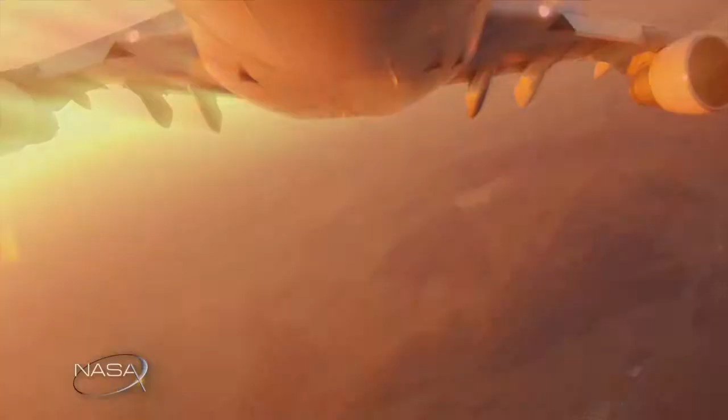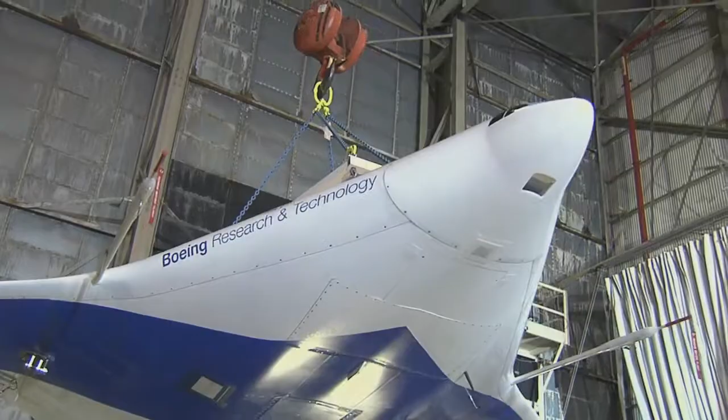But how will they reach these goals, and who is performing the important work to change the way we all fly? The common misconception is that most advances come strictly from major aircraft manufacturers. But the true story is much more complex. Unknown to most of the public is that one of the unsung leaders in aviation is NASA.

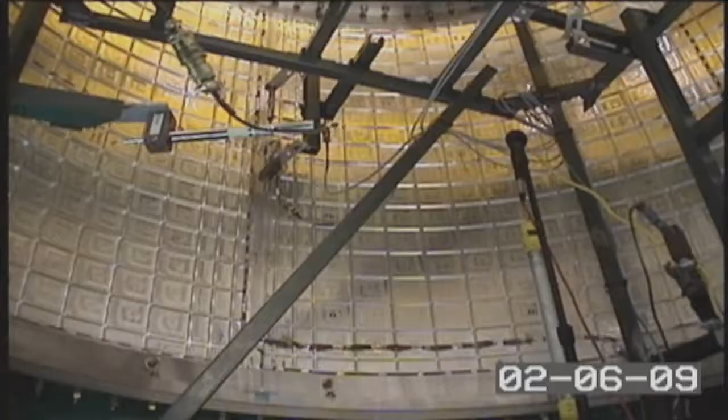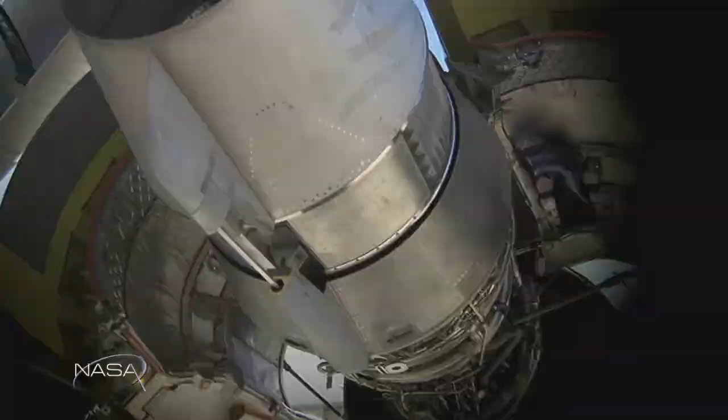NASA engineers work hand in hand with industry planners, developing and testing new designs to make aircraft safer, greener, and much more efficient. On this episode of NASA X, we will look at how this collaboration works, and we'll see how NASA and industry are paving the way for greener, safer aircraft for today and for aircraft of the future as well.

This is a familiar sight for modern travellers. Large metal jets roaring down the runway and lifting into the air. In fact, this sight really hasn't changed that much in the last 50 years or so. Other than the way most people dressed for flights back then, the basic concept of air travel is pretty much the same.

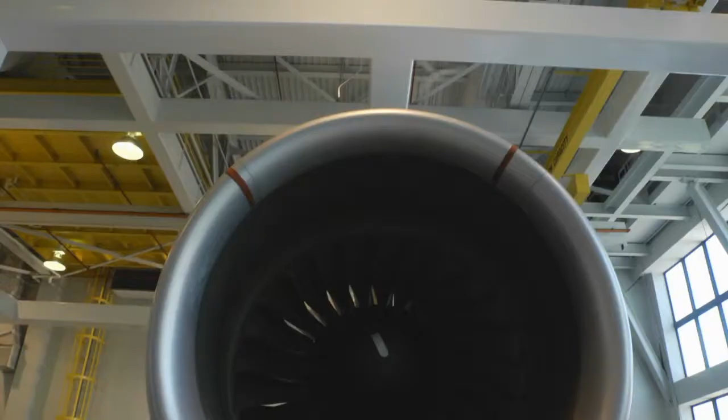There have, of course, been measurable differences in fuel economy, with new developments in engine design and noise reduction techniques. But the basic tube and wing shape and the material used to build these aircraft has remained pretty much the same for years. But that isn't the case anymore.

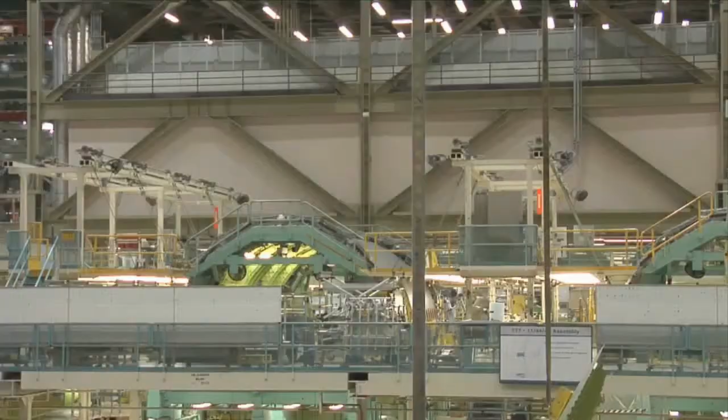Like so many products that have evolved dramatically in the last few decades, like phones for example, the same is true for aircraft design. Today more than ever, researchers are pushing the boundaries of the science of flight in their effort to make aircraft of the future more efficient, quieter, and greener. So who's taking the lead and why?

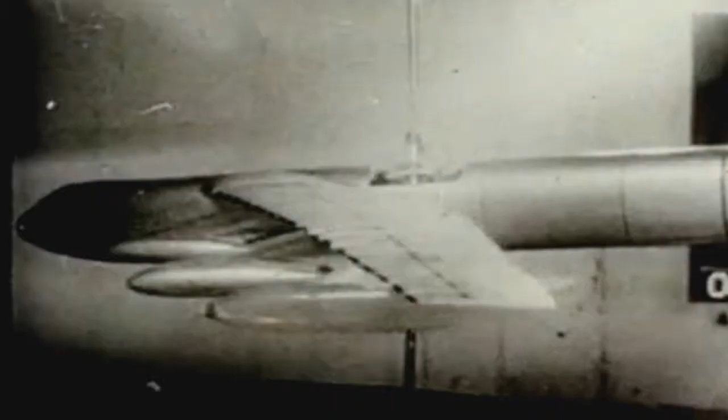Obviously industry is taking the lead in some areas because cleaner operations and more efficiency mean higher profits. But they're just not the only players. One of the leading innovators in aeronautics over the history of flight has been and continues to be NASA.

The push to modernise and change aircraft of the future is being led by NASA's Environmentally Responsible Aviation Project, or ERA. The ERA project is putting its money where its mouth is with tough but reachable goals to make big changes in how we fly by the year 2025.

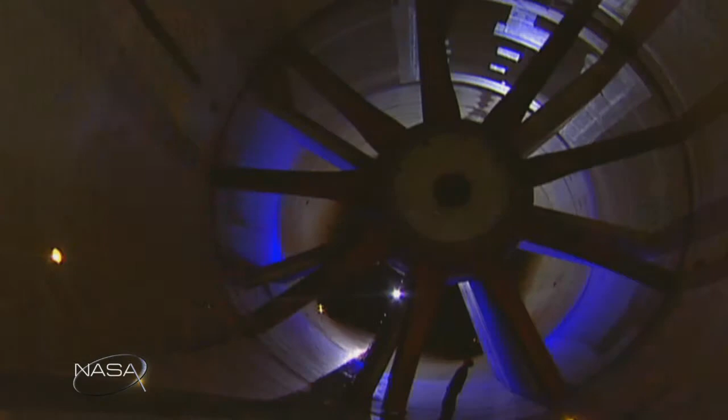So the Environmentally Responsible Aviation Project is a 5-year, 6-year project, and it's focused on advanced aircraft design and the technologies that are needed to enable them. The main goal of the project is to reduce noise, to reduce mission fuel burn, and to reduce LTO NOx emissions. And LTO stands for landing takeoff, oxides of nitrogen emissions.

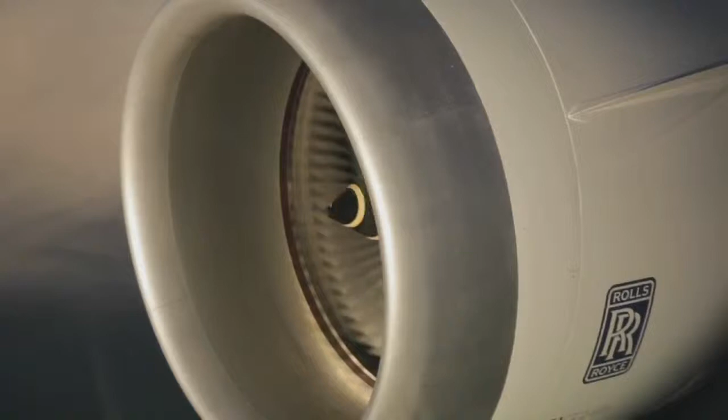And we want to do that simultaneously, and that's never been done before, where we looked at some very difficult metrics and tried to push all of those metrics down simultaneously. And so over this 5 or 6 years, we'll be looking at technologies, we'll be looking at aircraft designs and the combination of those to end up with a configuration that could simultaneously attack these goals.

So how do you make these goals a reality? The 4 basic principles of flight are lift, drag, weight, and thrust. Finding efficiency in each of these basic principles will help reach NASA's stated goals. Let's look at weight first. Obviously, if you can reduce the weight of an aircraft, then you will burn less fuel and therefore become more efficient. Airlines are always looking for ways to carry less weight.

You can see that in extra baggage fees, reduction of heavy items such as ovens and heavy carts on some planes. And in one of the most drastic measures taken in recent years, some airlines have begun asking passengers to use the bathroom in the terminal before getting on the plane, making the passengers a little lighter.

In a 1-month experiment, an airline found that they reduced greenhouse gas by 5 tons simply by asking passengers to use the loo ahead of time. This proves that even small changes in the weight of an aircraft can add up to big long-term benefits. The holy grail, of course, is to make the entire aircraft structure lighter.

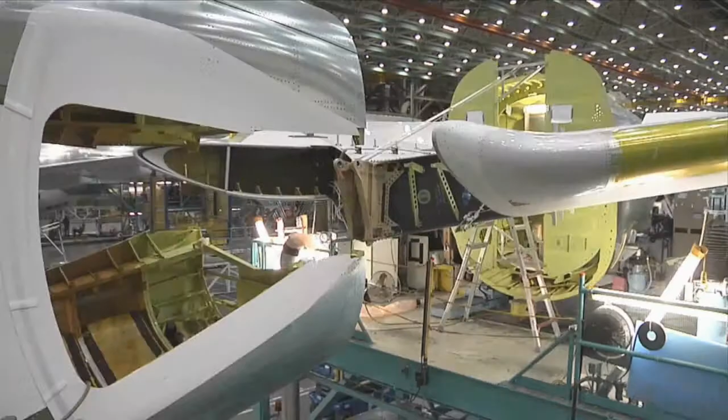So how can this be done? Today's aircraft are made out of metals that are safe, but that are also very heavy. So is there an alternative? In recent decades, NASA and its industry partners have been working hard developing new materials that could bring aircraft out of the 20th century and into the future.

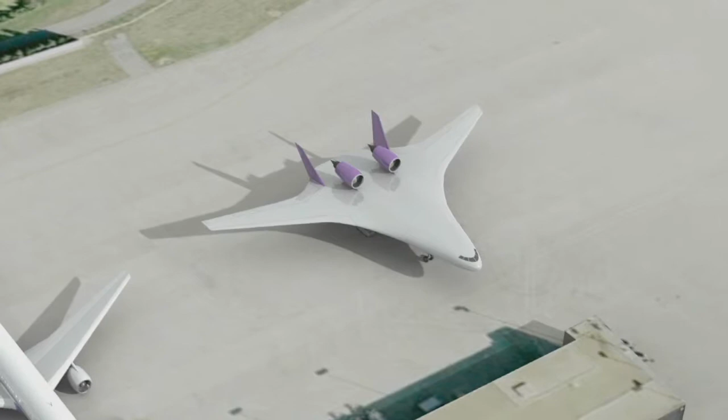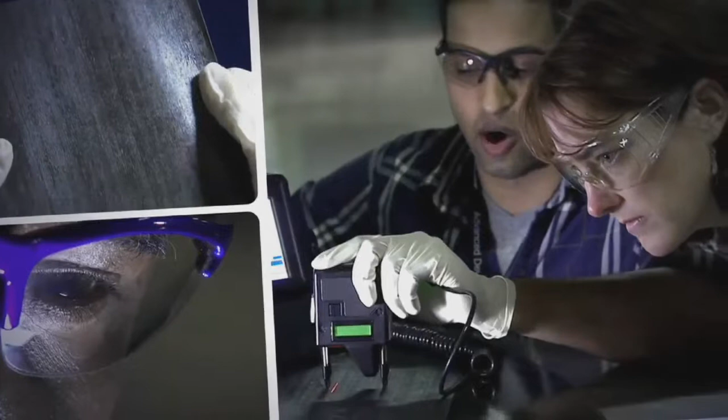New composite materials are leading the charge to replace conventional metals. Aircraft designers are taking advantage of composite materials' lightweight, strength, and flexibility. Aircraft designers have long known about these qualities and have been using something called carbon epoxy composite materials in small quantities for decades.

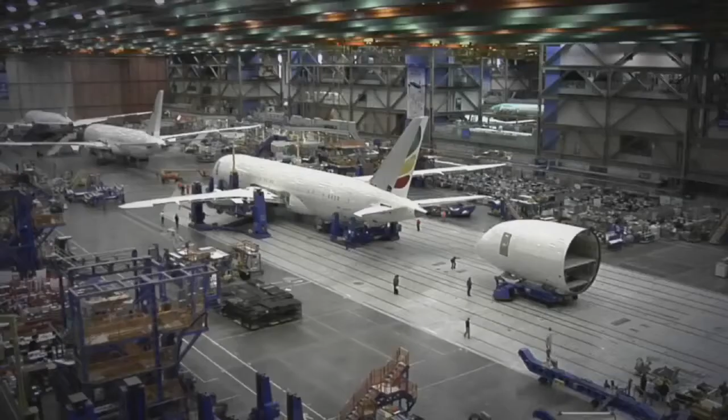After years of research and validation of composites for flight, the Boeing company was the first to step up and build an aircraft almost completely out of composite materials. Called the 787, this next-generation aircraft first came into service in October of 2011. As the first official commercial flight of the 787 took off from Tokyo that year, it was clear that this concept of an all-composite aircraft was here to stay.

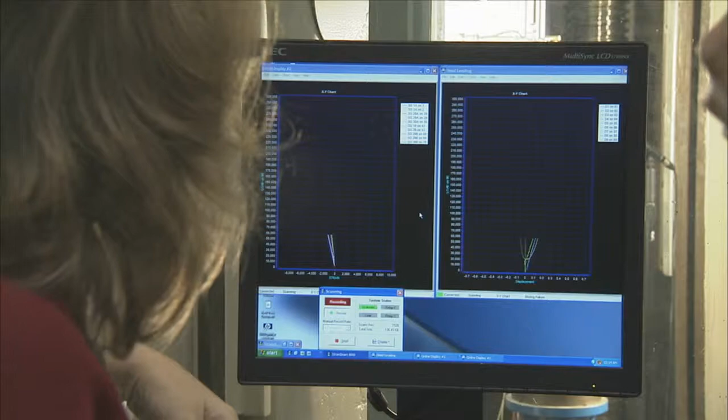NASA is not in the business of building aircraft, but they are in the business of helping lead development programs to move the science of flight along. Once validation and testing in the development process is complete, NASA shares its findings with industry in an attempt to help further research and development.

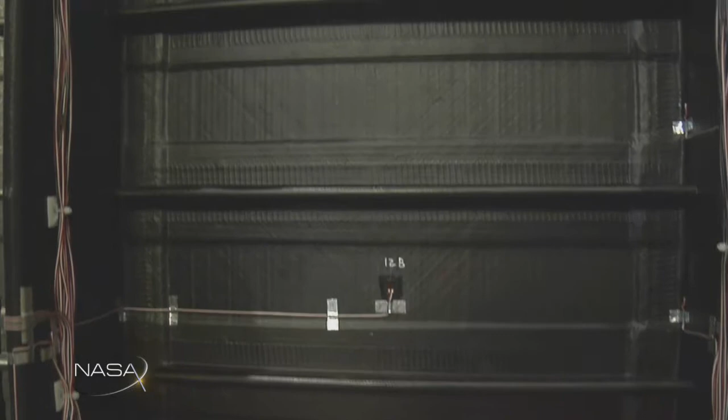One of the programs in which NASA is working with industry is in the development of new composite materials for aircraft. Here, in the Structures and Materials Lab in Building 1148 at NASA Langley Research Center, much of the development of next-generation composites for use in aircraft is taking shape. Called PRSEUS, this new idea has the potential to completely rewrite how composites for use in aircraft are made.

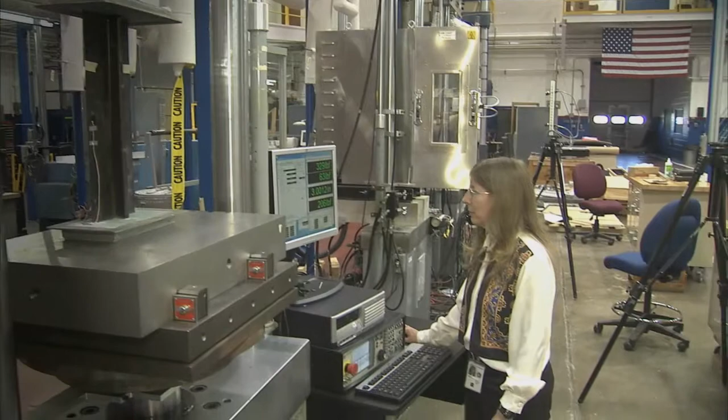Leading much of the research for NASA's environmentally responsible aviation program in the composite field is NASA Langley's Dawn Jegley. This MIT grad has been working with these materials for decades and has a keen understanding of what needs to be done to make these composites of the future fly.

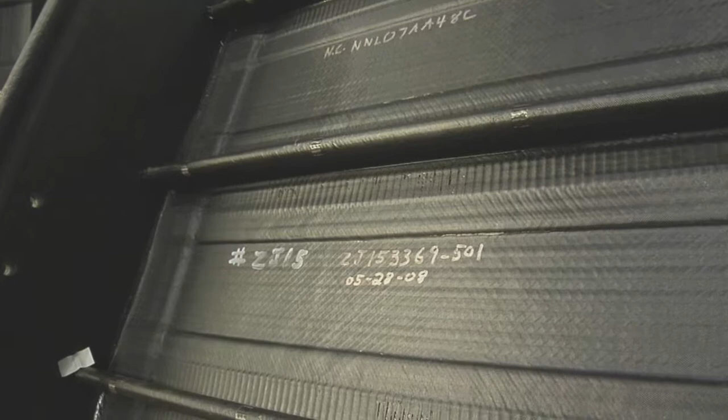PRSEUS stands for Pultruded Rod Stitched Efficient Unitized Structure. And what that means is that we have a graphite epoxy or a carbon epoxy structure, and what we have is pultruded rods inside carbon layers. We have a carbon skin, and we have stitches that run through the thickness that holds the whole thing together.

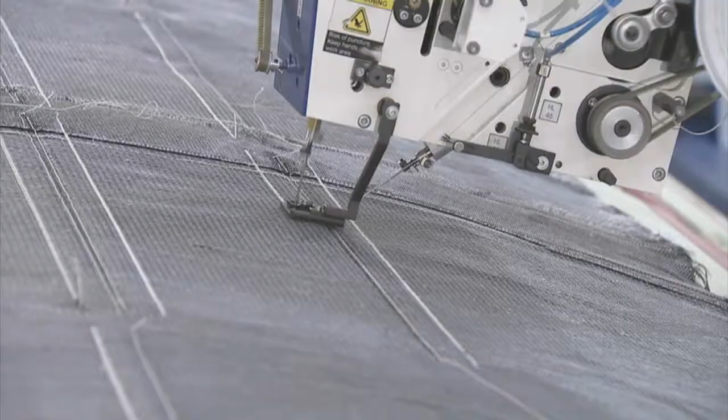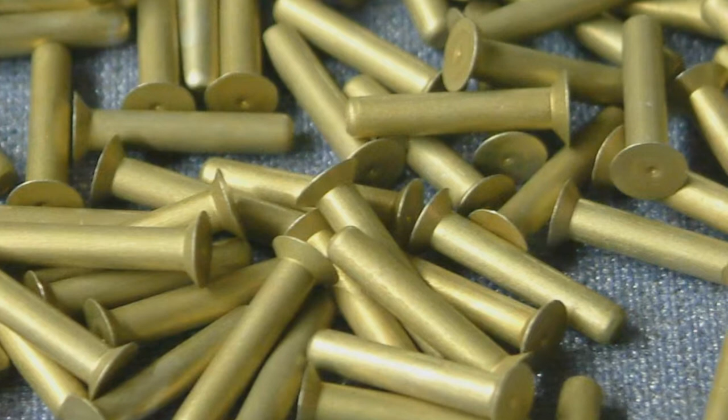One of the huge benefits associated with PRSEUS is its revolutionary stitching technique. On current metal and composite aircraft, one of the key components used to hold the vehicle together are the fasteners, like rivets or bolts. Although these are effective, one major drawback is that quite a few holes have to be drilled into each piece where the fasteners will be added. Not only is that labour intensive, but each hole represents a place where damage or a crack could start.

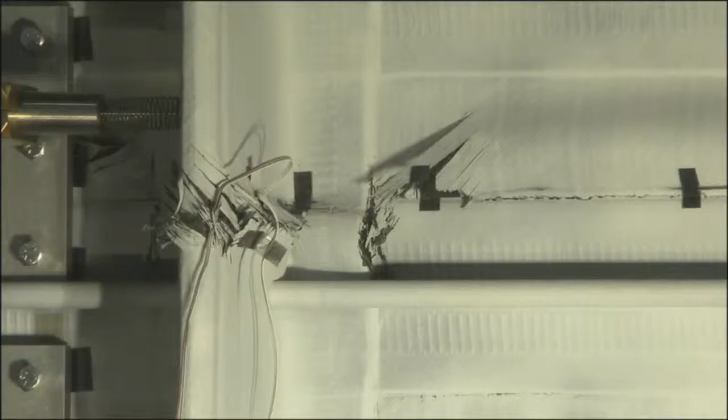But the stitching prevents that from happening. We found that if you have a crack and it grows to a certain point and it gets to some place that it's stitched, that crack will turn. So instead of going through the stitching, it will turn, and that's a good thing because in flight you would rather not have a crack grow all the way around a wing.

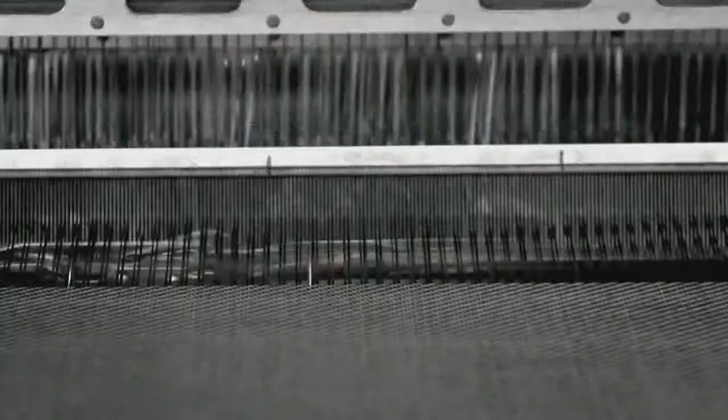When you look at a piece of carbon epoxy composite material, it honestly doesn't look very strong in its raw form. But once it is in its final state, it can be much stronger than metals. We start out with a fabric. It looks kind of like carpeting. And you roll that out into the shape that you're looking for, and you position all the different parts of your structure where you want them, and then you come through with a stitching machine.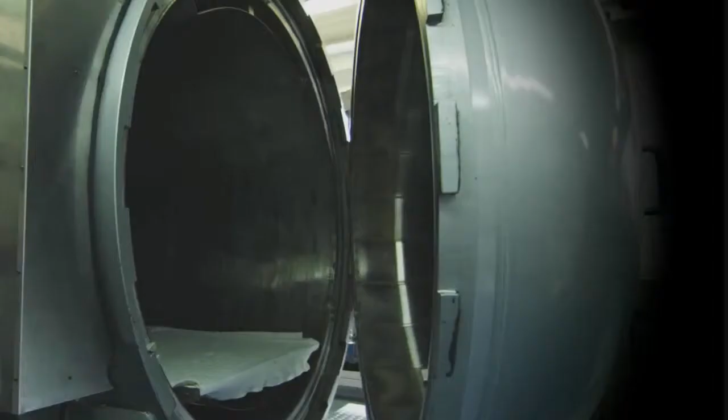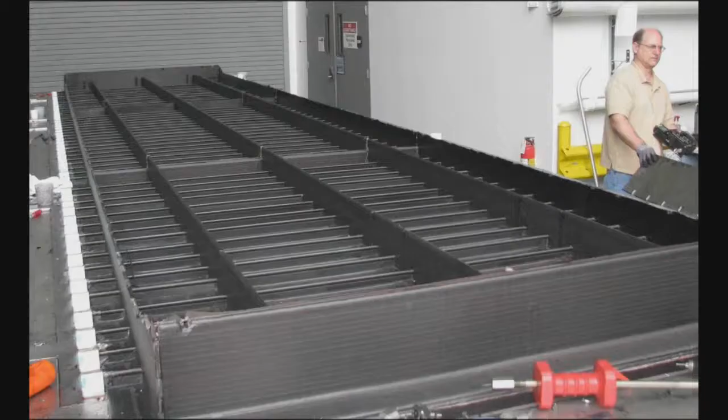After you've stitched the whole thing together, the panel goes into an oven. It's infused with epoxy. We heat it up, and then we get everything just the way we want it, and then we cool the structure. So what happens is you end up with a piece of material, could be a very large piece of material, which is now stiff and strong and just in the right shape that you want it.

Another key component to carbon epoxy composite materials is that they can be tailored to be much stronger than metal. At the molecular level, the properties of metal are isotropic, which means that the properties are the same in all directions. Because of this feature, aircraft designs are very bulky in some areas to provide stiffness, making a craft much heavier. But with composites, you are starting with fibres which are very strong, tough threads, and you can position those threads in any direction you want.

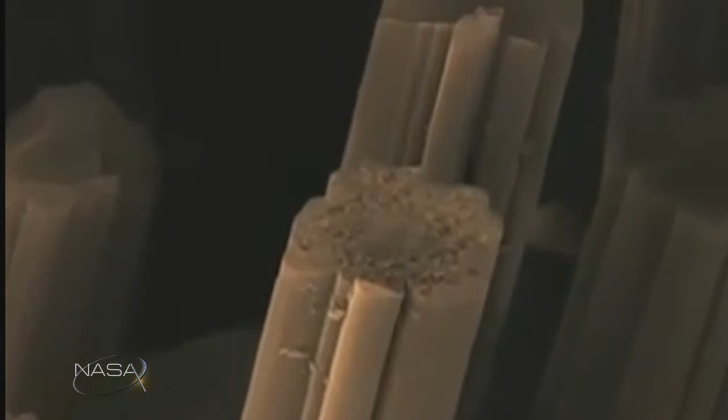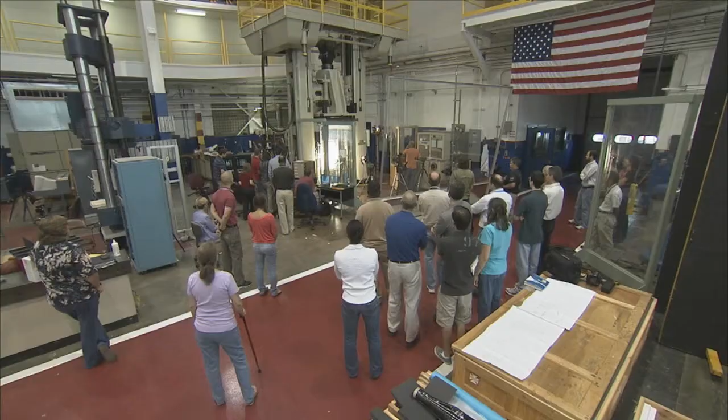For example, if there is an area on the aircraft that takes a lot of load, the designers can place the fibres in that direction, providing enormous strength, but while also using much less material and weight than metal aircraft. Of course, validating that the pieces will work is a major component of the development stage. So I know that NASA really does some great testing of its materials before they go onto any aircraft.

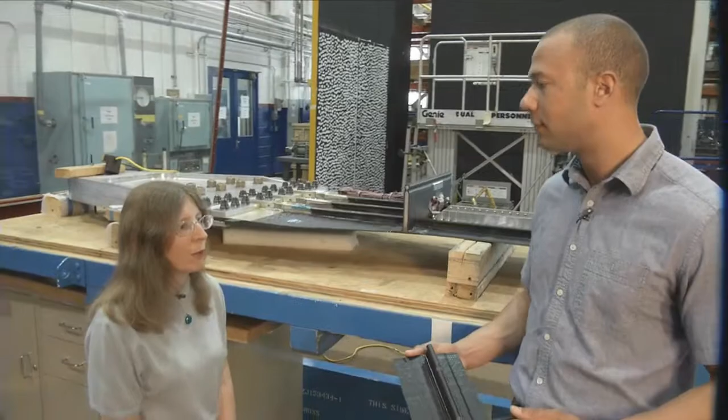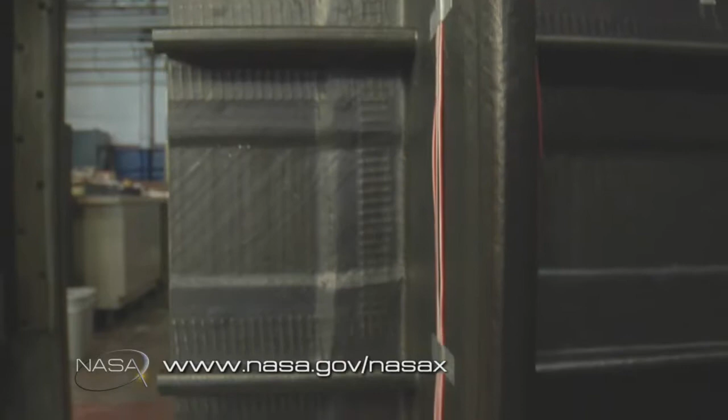How are you testing PRSEUS at the moment? One of NASA's goals is to develop technology for future aircraft. When we're developing a new structure, one of the things we need to do is fully understand how it's going to behave. And to do that, we start by looking at very small pieces, and then we move up slowly to very large pieces until we get to a full-scale part of an aircraft.

And then when we understand that, we go to the next stage, which might be something more like this, where we have what we call a built-up structure. So we have a skin, and then we have a stiffener on it. And then we can apply a load. We might push on it, we might pull on it, we might bend it, to look at how that behaves.

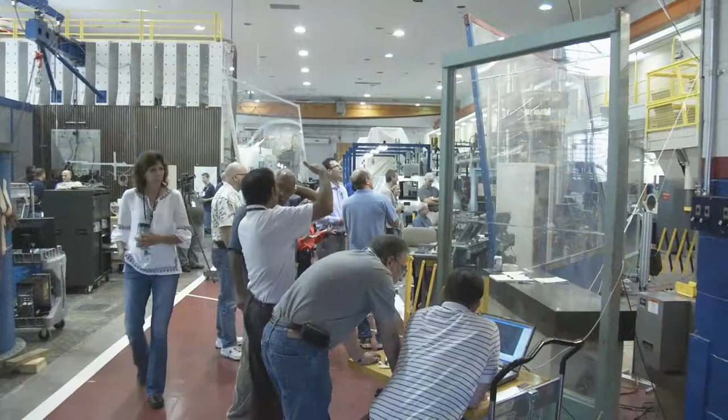And all the while we're doing this, we're doing analytical studies to make sure we understand and can predict how it's going to behave. Because if we don't predict it properly, then we feel we don't really understand it well enough, and we have to take a step back and figure out what it is we're missing. We have many facilities around the center here that we use for doing those kind of tests.

Well, Dawn, thanks so much for talking to us today about PRSEUS. This looks like an amazing technology, and you're doing a fantastic job. Thank you so much. Thank you.

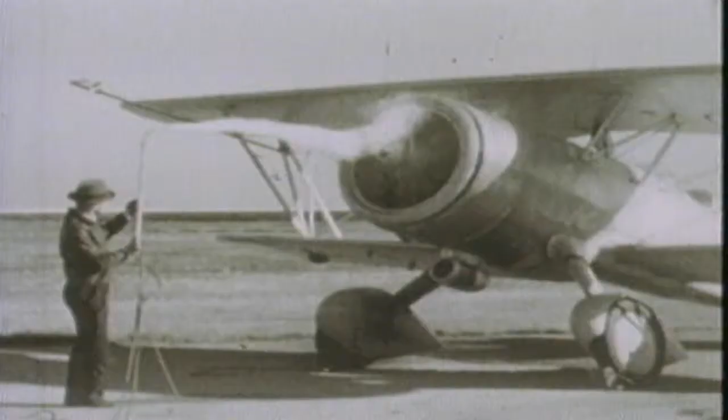Up next, let's look at another of the basic principles of flight: thrust. Since the earliest days of flight, engineers have looked for ways to make the engines we use on aircraft more powerful and efficient. One of the most important early engines was the 1903 Wright brothers design that was used for their very first flight at Kitty Hawk. It only produced about 12 horsepower, but it opened the door for all aircraft engines to come.

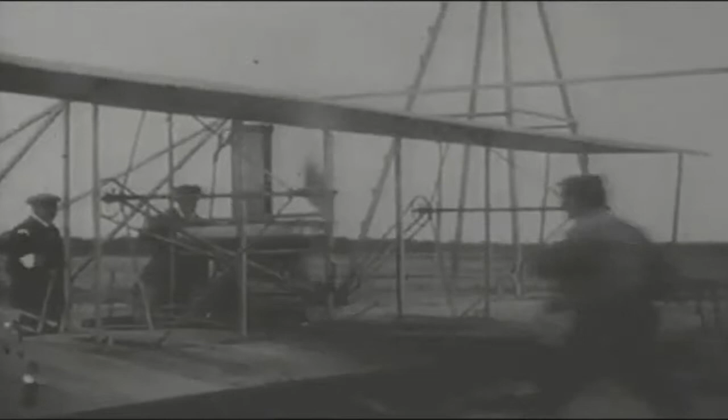Since that time, there has been a steady progression in the development of engine technology, from the relatively simple propellers of the past to the incredibly advanced jet propulsors of today. Engines have never been better, but although current engines are already very efficient, quiet, and relatively green, they pale in comparison to what the next generation of engine technology will be.

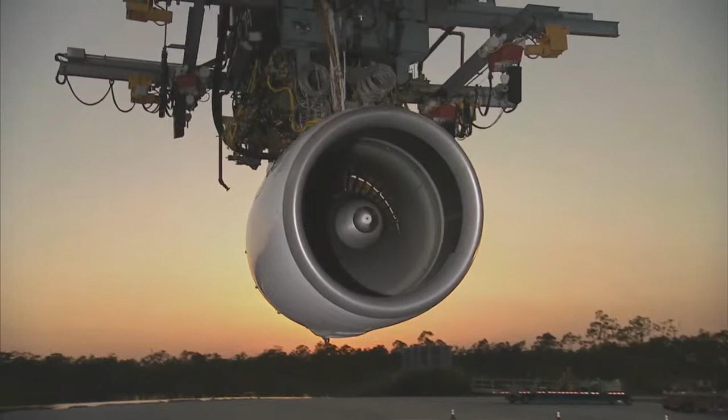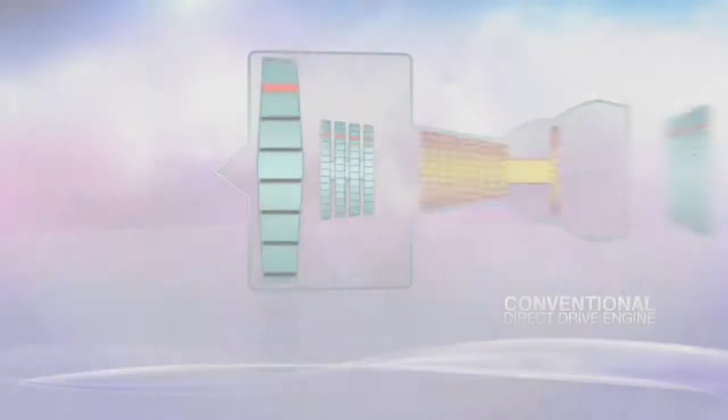To help understand how engine technology is improving, let's first take a look at how a basic turbofan engine works. Incoming air is captured in the engine inlet. Some of the air passes through the fan and into the compressor and burner, where it is mixed with fuel for combustion. The hot exhaust passes through the core and fan turbines and then out of the nozzle. The rest of the incoming air passes through the fan and bypasses or goes around the engine. So a turbofan gets some of its thrust from the core and some of its thrust from the fan.

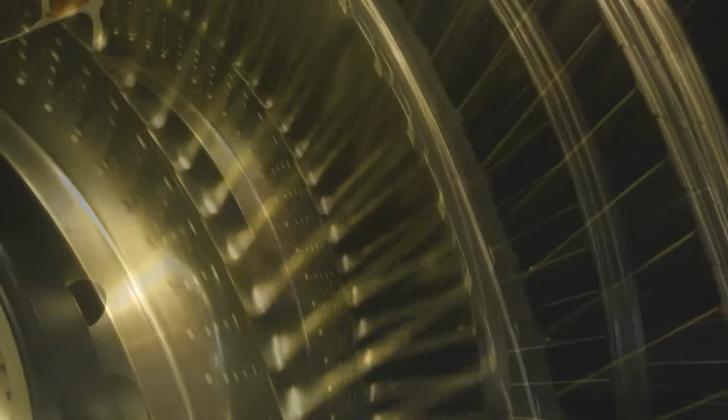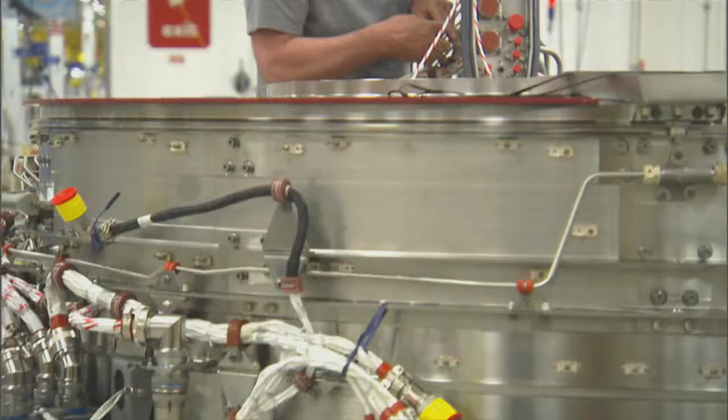The ratio of the air that goes around the engine to the air that goes through the core is called the bypass ratio. Many engines today have a bypass ratio of roughly around 5:1. Engineers have known for many years that if they could increase the bypass ratio, then the engine would become much more efficient. But the trouble with increasing the bypass means that the size of the engine would have to grow, making it heavier and also unable to fit under the wings of most planes. So, what to do? Over the past 20 years or so, NASA and industry have been working on a solution that would create ultra-high bypass engines while also addressing the stated problems of size and weight.

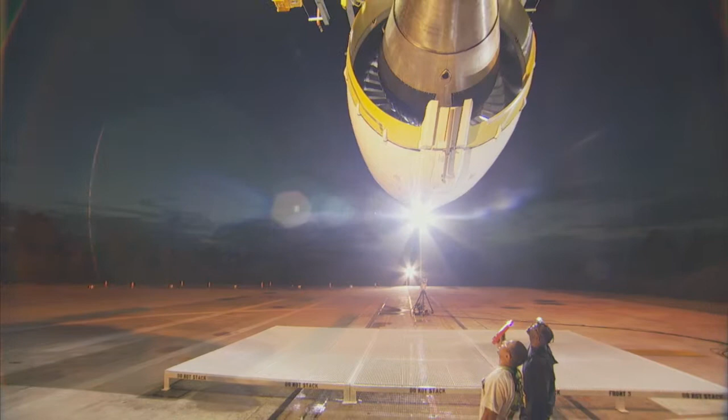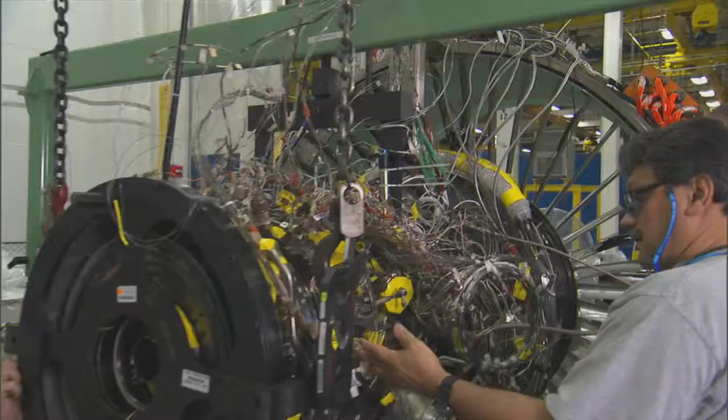Today, a new engine designed in collaboration with Pratt & Whitney and NASA has been developed that will more than double the bypass of current engines. This new engine design has taken many years of research and development just to get to the point where we are today, because three key pieces of technology needed to be created that didn't exist: a new gearing system, an ultra-efficient fan, and a more efficient nacelle.

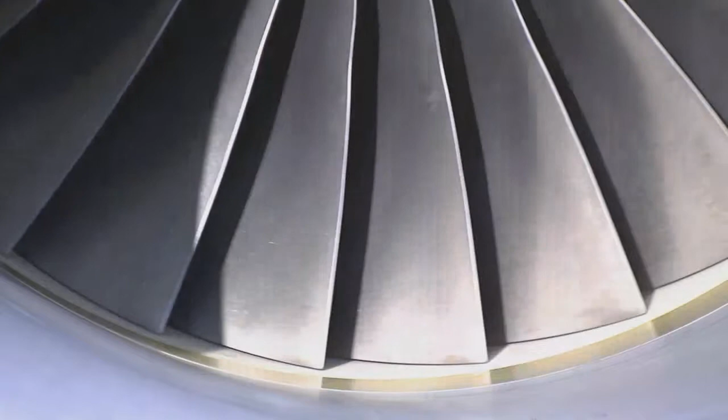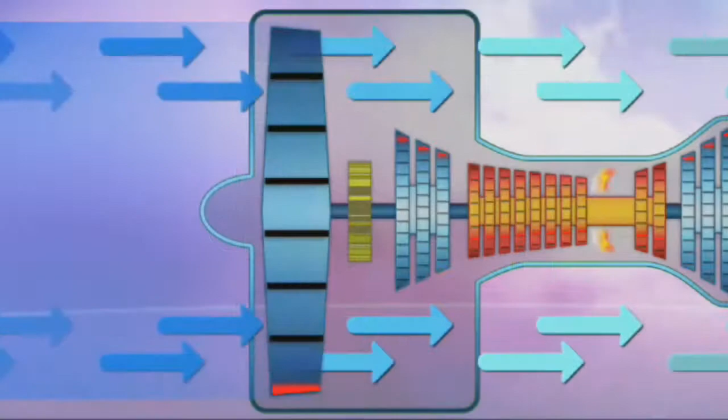Although each of these were difficult to perfect, one of the most challenging was the gearing system for the turbofan. This is because there is a paradox in engine design. The slower the big fan at the front moves, the more efficient it is, but the turbines at the back have to move at a very high rate of speed to work efficiently, hence the paradox. In order to have the slow-moving fan at the front and the fast-moving fans at the back working together, a revolutionary gear system had to be developed that could allow both of these parts to work together optimally.

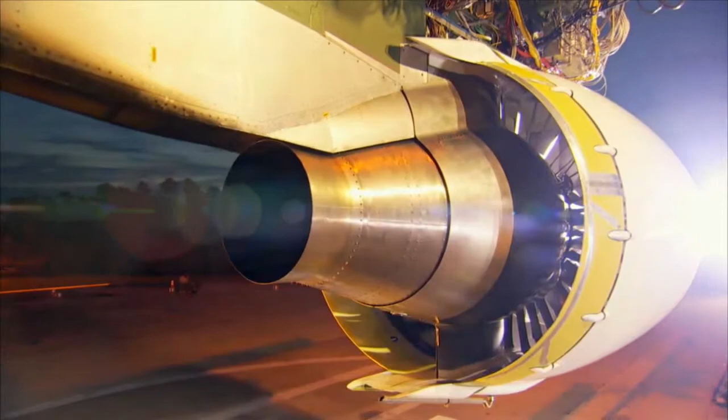So what the gear lets me do is shrink the core engine that makes the power to a large degree. It makes it lighter, takes a couple of thousand parts out, and it means I can replace some very rare super alloys with some more common gear steel. We always knew you could do that, but you need a gear that's way over 99% efficient. We're talking about 25,000, 30,000 horsepower gears.

A naval ship has that sort of power, and the gear is the size of a small house. We had to develop a gear that's the size of a small automobile wheel, not a house, and it has to last 20 years without maintenance, and it has to be super efficient. And so we've been working on this for at least 20 years.

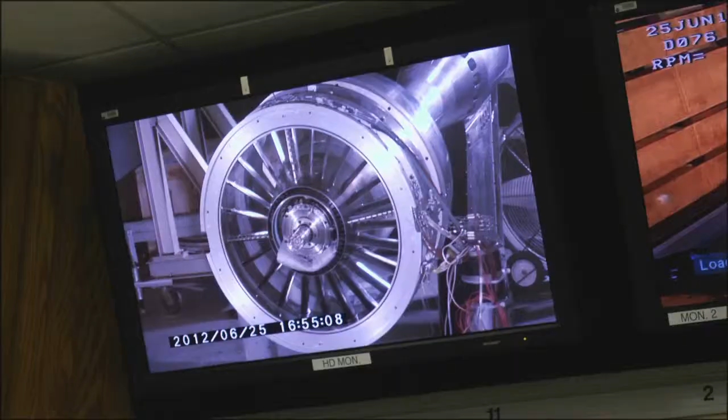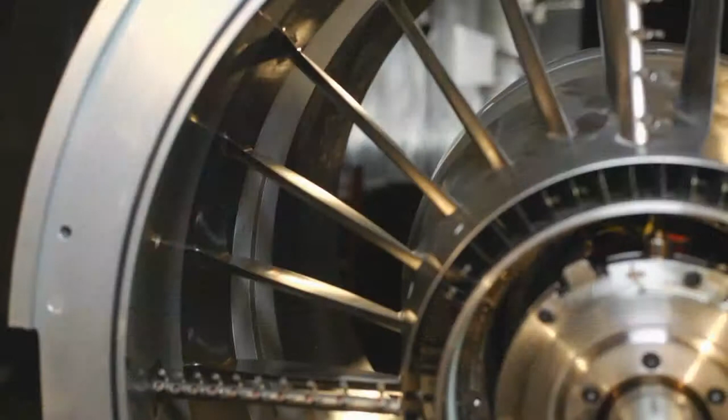Much of the testing for this engine has in fact come at NASA laboratories. NASA's unique facilities and subject matter experts have helped the Pratt & Whitney team to understand how to configure the ultra-high bypass engine. So this is an example of the ultra-high bypass engine from Pratt & Whitney called the geared turbofan. This particular engine has a bypass ratio of up to 15:1, which means 15 times the amount of air goes through this part of it than goes through this part.

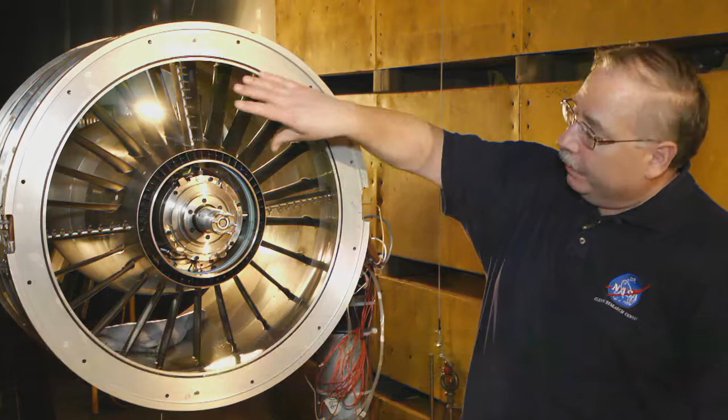This is the core, or the engine part. This is the bypass part. In this particular engine, all the thrust is generated in this part, and we've removed the fans so that you can see how small the engine airflow is compared to the overall flow.

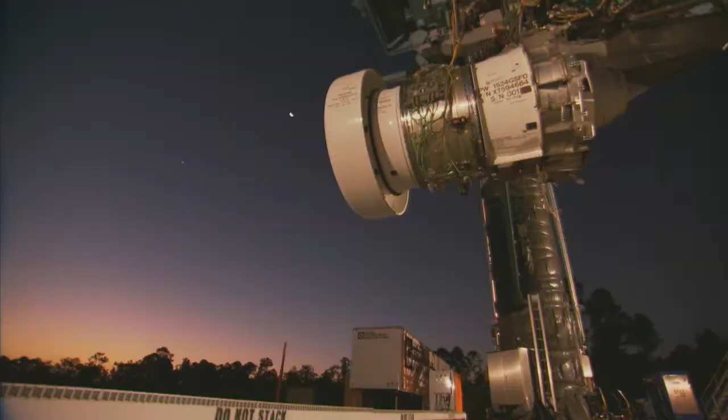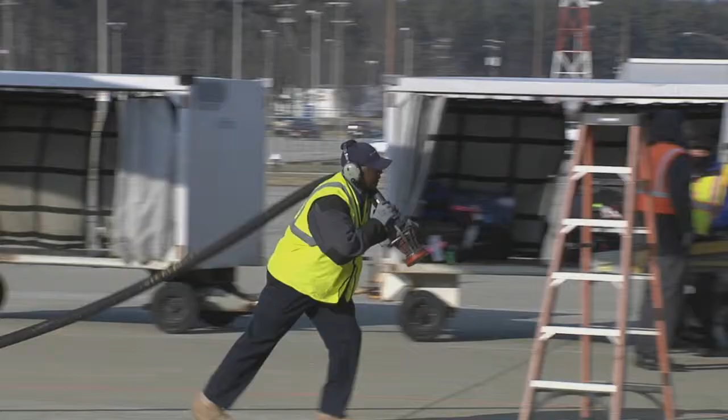So why do we want to do this? Well, this particular design, especially the one Pratt & Whitney is working on called the geared turbofan, has the potential of having as much as 20% better fuel burn than a regular jet engine today. And the reason they can do that is because the more air that you can put up here, the more efficient the engine is and the better the fuel economy. Because fuel costs have spiraled out of control in recent years, the fuel efficiency of this engine could be a game changer for the aircraft industry.

The people who care are not so much Airbus, but their customers, the airlines. So an A320 with these engines on compared to the current engines will make $200 to $400 an hour, on the order of $1.5 million to $2.5 million a year reduced fuel costs, depending upon the cost of fuel, typically. So it's worth millions per year for the airline. That doesn't mean they still won't charge you for the extra bag, though.

Of course, fuel economy is not the only huge benefit to this engine. Its noise reduction capability is truly astounding. On a typical jet aircraft, the fans at the front are moving at more than the speed of sound, making them very noisy. But because this new engine's forward fans move slower, they now make much, much less noise. They are really quiet. And how quiet is really quiet?

For a 737-sized airplane, 150 passenger airplane, the objectionable noise on the ground, the area that hears objectionable noise, is reduced by about 3/4. Almost to the NASA goal, which is to keep it in the airport.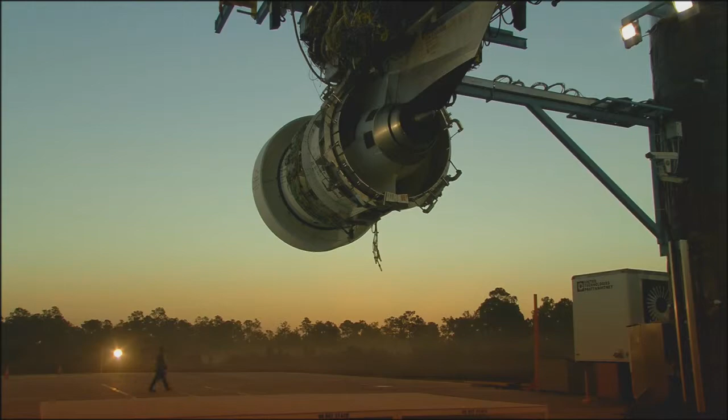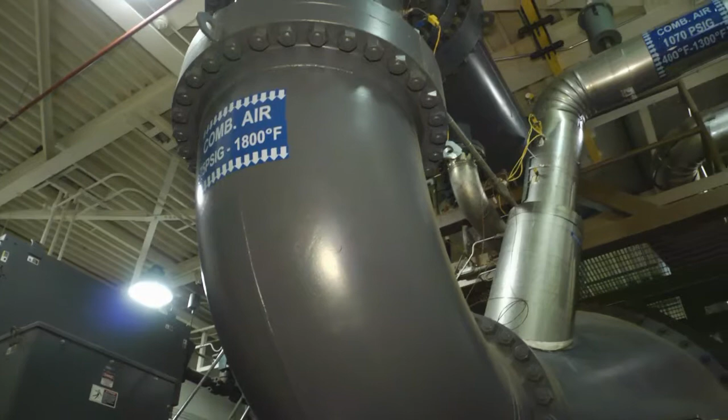Another key component in the testing chain of the entire engine happens here at NASA Glenn, in the Advanced Subsonic Combustion Rig, or ASCR. This facility is the only one in the country that allows real-time, real-world testing conditions for engine combustors. This is the Advanced Subsonic Combustor Rig. It's really one of the unique facilities in the U.S. which enables us to test combustors and gas turbine engines at realistic conditions that they would see in a gas turbine engine flying in today's aircraft and even those in the next 20 years from now.

The real beauty of this rig is it allows us to operate pretty much over the whole flight regime. So we can map out what the emissions are near the ground during idle and takeoff conditions, but also on approach and landing. In addition, then even at cruise, because we're also becoming more and more concerned about emissions in the atmosphere and what that does to our environment.

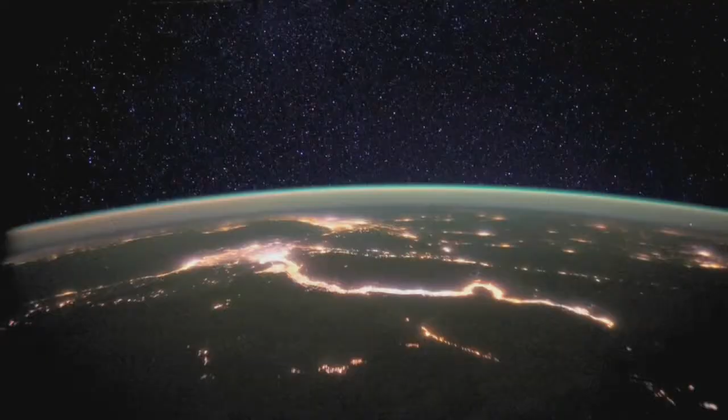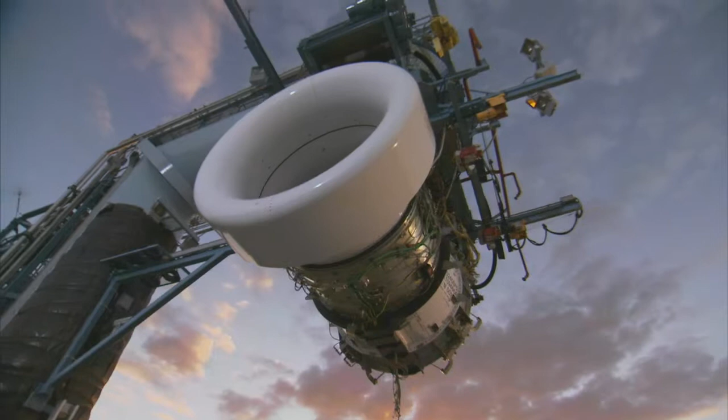The environment is one of the key components in much of the work going on now. NASA and industry realize that good stewardship is not only beneficial to the planet, but can be a good business model too. The work that is coming out of this program is looking at both fuel-flexible applications as well as strictly environmental concerns. Our geared turbofan is 15% more efficient and can run on a wide range of fuels. In fact, we're some of the leaders working with the industry in the development of biofuels.

Of course, testing for these new engines is not only happening at NASA, but can also be seen on a unique airplane owned by Pratt & Whitney. Pratt & Whitney actually owns two 747 airplanes that we do testing on. There are 4 engines on a 747. We'll actually take one of the existing JT9Ds off, which is a Pratt & Whitney made engine that powers 747s, and we'll in some cases replace that engine with one of our test engines. So we'll run the airplane on 4 engines, 3 of which are currently certified on the airplane, the 4th being the experimental.

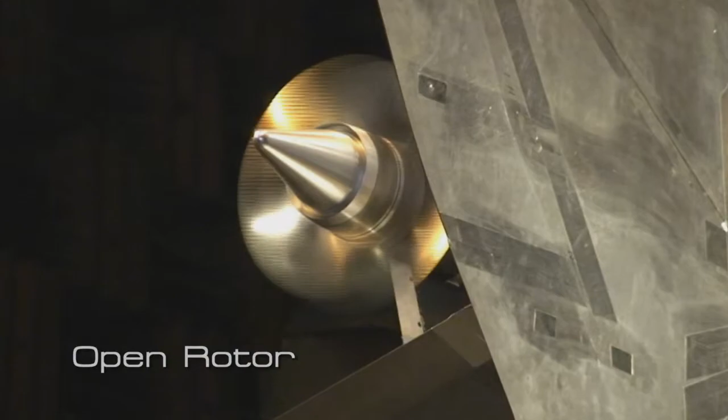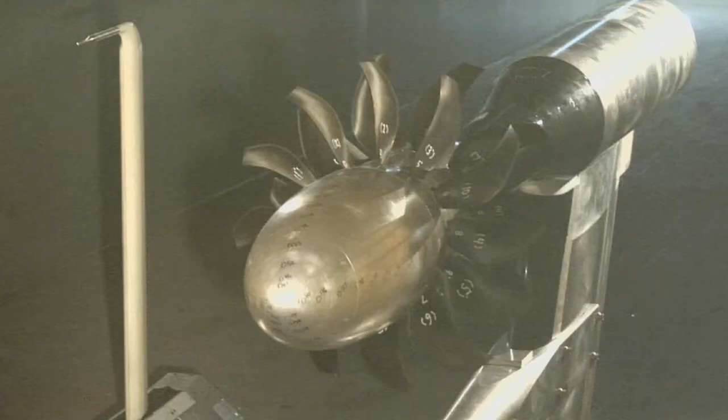Of course, this new geared turbofan is not the only game in town. NASA has also taken a look back at some older technology, including a concept called the open rotor that also shows much promise. So here at NASA, we're working on the next generation of engine technologies, both ducted engines like the geared turbofan and unducted engines like open rotors. We recently finished a series of tests with General Electric and the Federal Aviation Administration on open rotors, looking at these technologies to reduce fuel burn and improve the acoustic performance of these next generation engines.

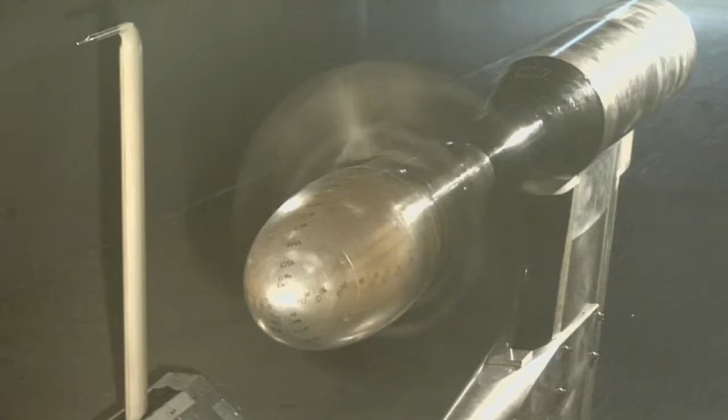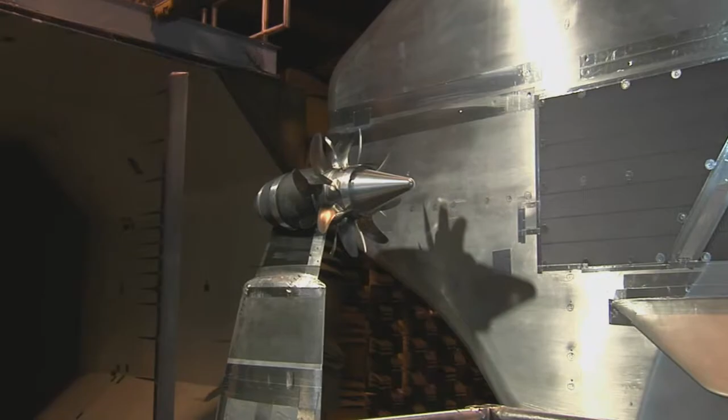So as you try to go to higher and higher bypass ratio engines, the fans keep getting larger and larger diameter, and at some point it just makes sense to get rid of the cowling and go with what essentially looks like a propeller. The difference is that these are very specialized high-speed propellers, so that an open rotor powered aircraft would be able to fly at essentially the same speed as an aircraft with a jet engine.

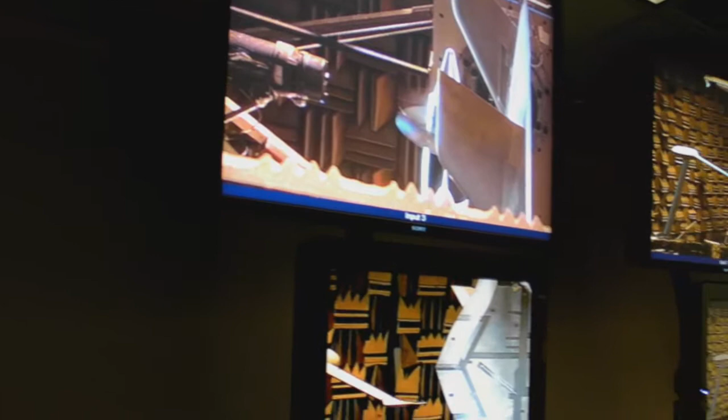In the past, the open rotor concept had been promising, but the major drawback was the noise. Thanks to the advent of modern computational fluid dynamics, NASA and industry engineers have been able to redesign the blades for these open rotors and make them much, much quieter. The system studies that NASA's done have shown that for single-aisle aircraft, if we built an open rotor engine today and put it on an aircraft, it would probably be quieter than most of the aircraft that are flying out there right now. So we've come a long, long way in being able to solve the acoustics issues that were part of the original unducted fan program.

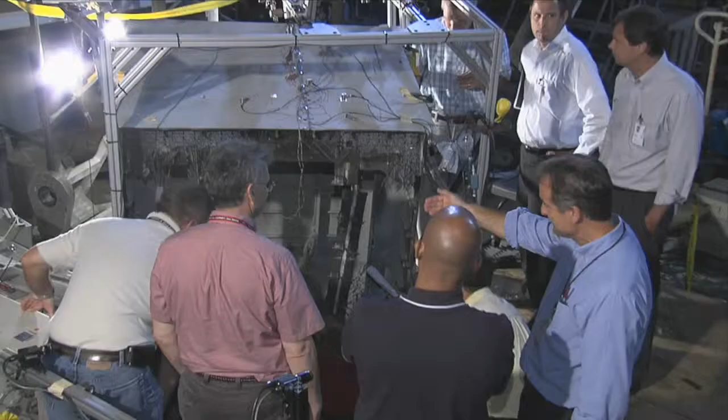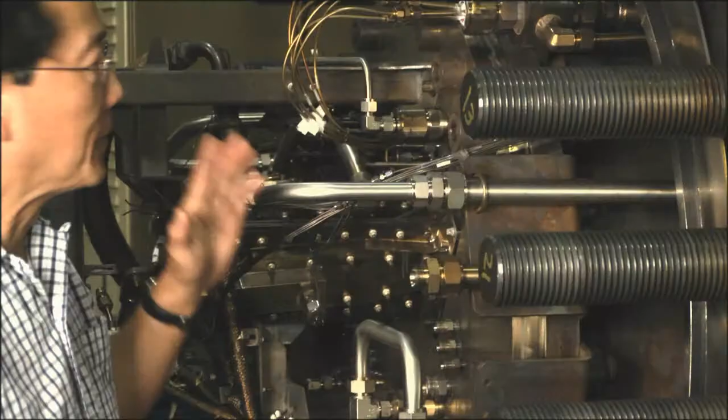So, there you have it. NASA's ERA program and industry are truly changing the way we all fly. NASA is pushing the industry hard to make these changes see the light of day, and industry is responding with truly innovative and groundbreaking technologies. With this type of collaboration and work ethic, there's no doubt the world will soon see a dramatic difference in the way we all fly.